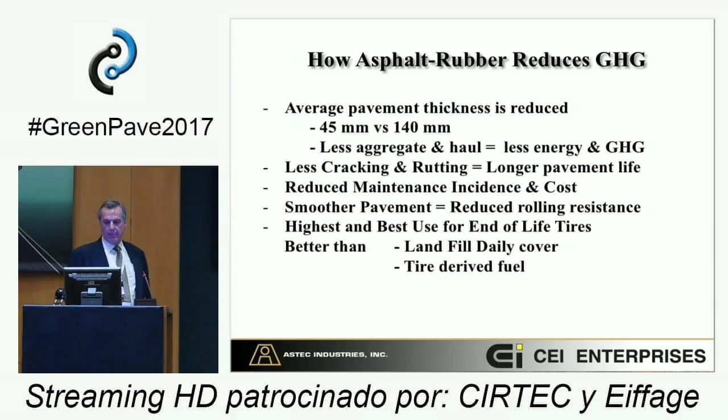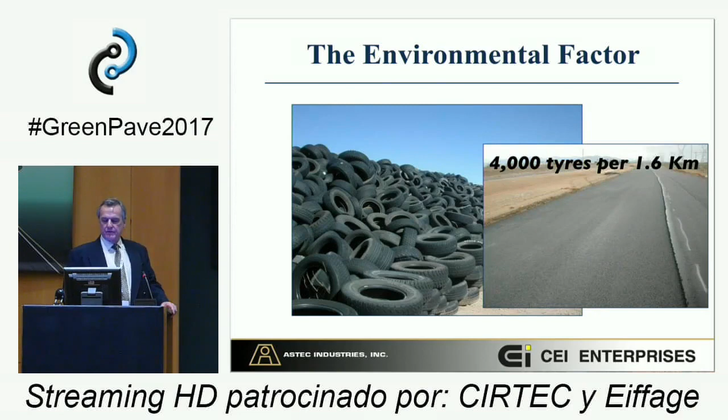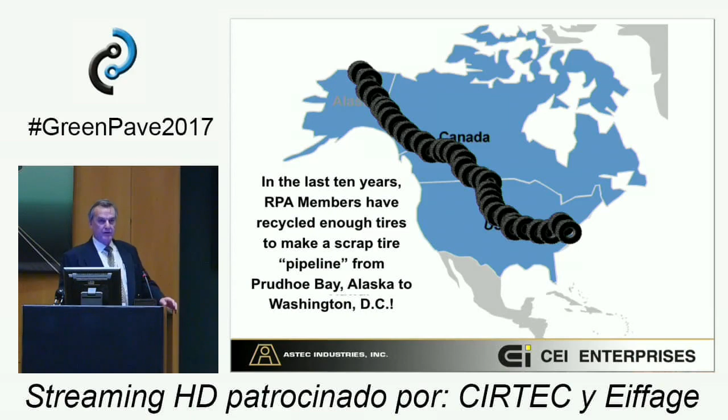We've talked quite a bit in the last day and a half about the environmental factors, but the utilization of tires into the roadways presents a significant outlet for these end-of-life tires. To put this in perspective, the Rubber Pavements Association figured a few years ago that over the life of that organization, its members had utilized enough tires and rubber to connect Prudhoe Bay, Alaska with Washington, D.C. That's a distance of 4,500 miles, or about 7,200 kilometers. To put that in European geography, that would basically be a tire road from Lisbon to St. Petersburg and back. So clearly there's a lot of opportunity to utilize tires in a very useful fashion.

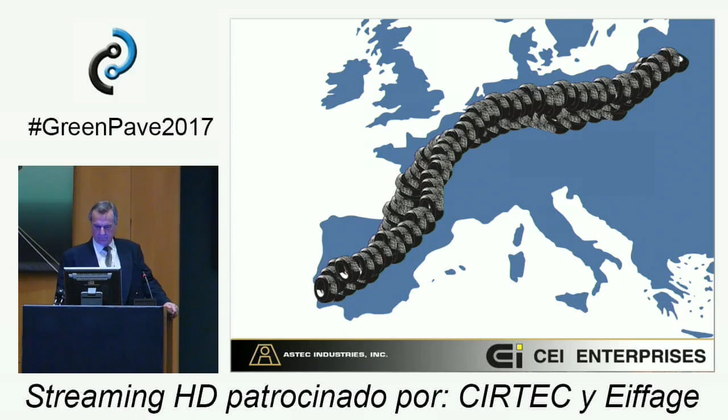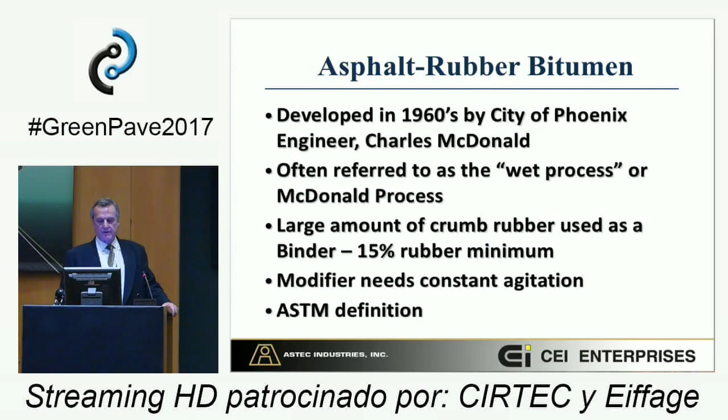So the history of asphalt rubber has been covered in some detail. The introduction of the technology by Charles McDonald is well documented. As far as the field blend wet process, there is an ASTM definition, and it basically says that you're using 15% or more of crumb rubber by weight. Most U.S. agencies - specifically California and Arizona - have a target of 19 to 21% crumb rubber. That's a typical utilization range. The specifications call for 18 to 22%. And the minimum target viscosity they're trying to achieve is 1,500 centipoise.

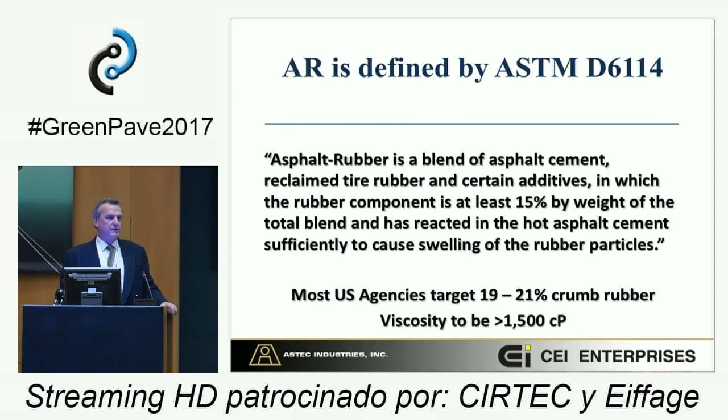So successful production of asphalt rubber is clearly a matter of proper heat management, and that's been touched on in the past here. The virgin asphalt temperature needs to be at least 190 degrees Celsius, which is 375 degrees Fahrenheit - that's the Caltrans minimum specification. Most of the blenders in the field like to have the virgin asphalt even hotter than that, as much as 220 degrees Celsius, simply because of the cooling effect that occurs when the rubber is introduced into the asphalt.

Aggregate temperatures are typically less than 163 degrees C, and at the breakdown roller, about 143 degrees. There are specifications in California that require ambient temperatures be greater than 13 degrees C in order to properly pave with rubber-modified asphalt.

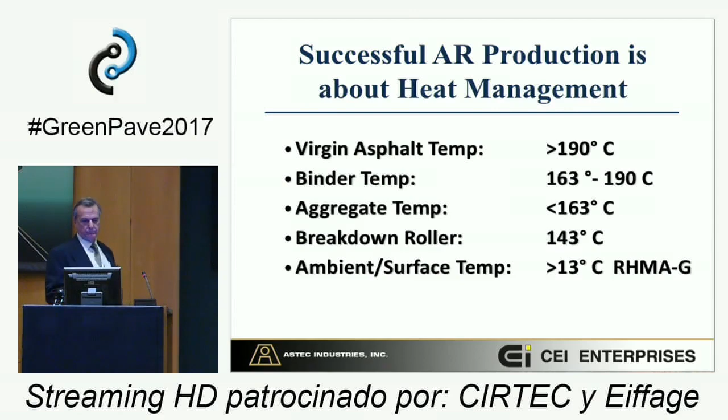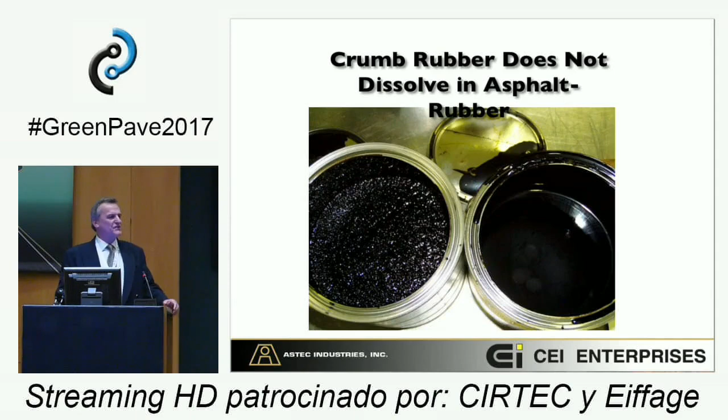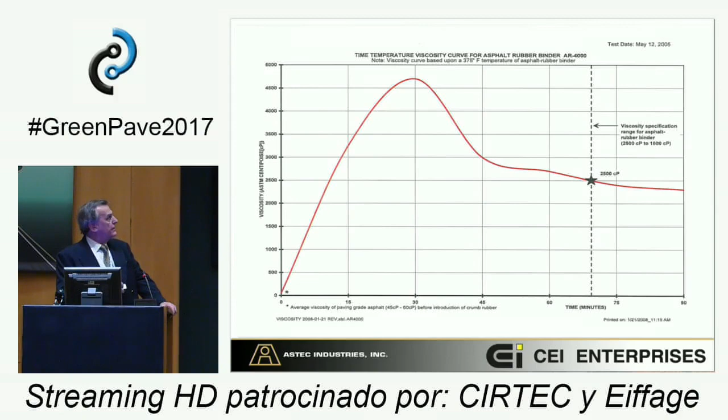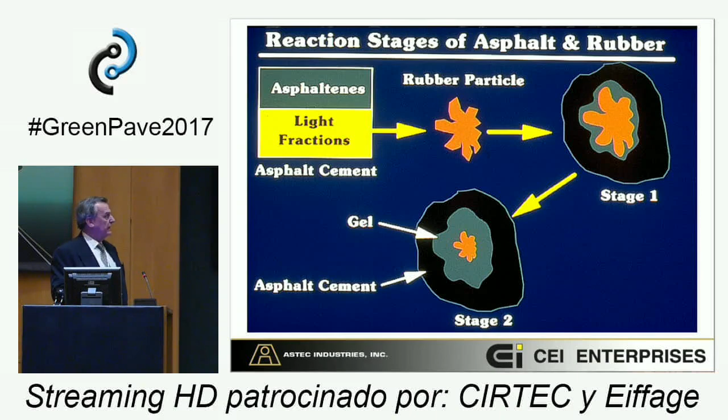The phenomenon occurs because of the temperature of the material, the reaction time, and other qualities, whether you're using a cryogenically produced crumb rubber or ambient grind. It all has to do with the surface area characteristics of the rubber particle and how rapidly and effectively it absorbs the asphaltenes. And of course, the nature of the asphalt is a key characteristic also.

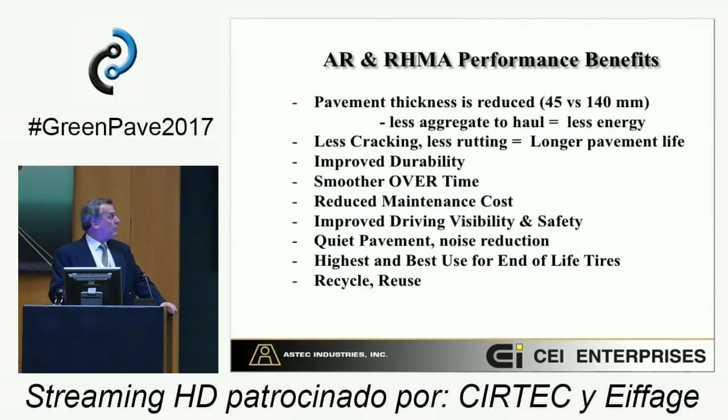I think George Way covered the performance benefits of the material quite well yesterday. But I did want to show these slides.

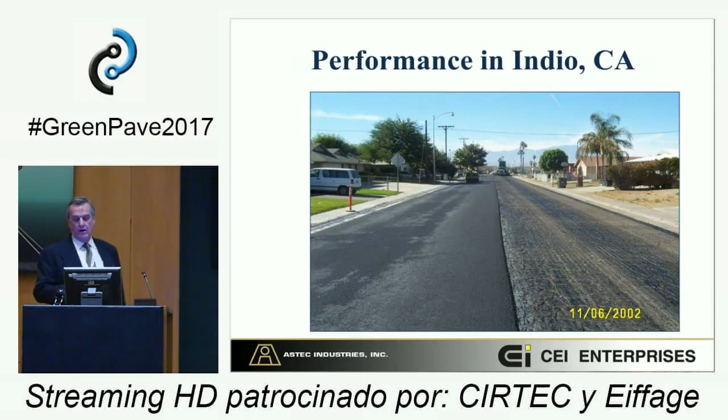These are some field slides. This was a residential street in Indio, California, near Palm Springs - a hot desert climate. Ambient temperatures in the summer are 40 to 45 degrees Celsius, or upwards of 110 to 120 degrees Fahrenheit. And you can see the old pavement is very cracked.

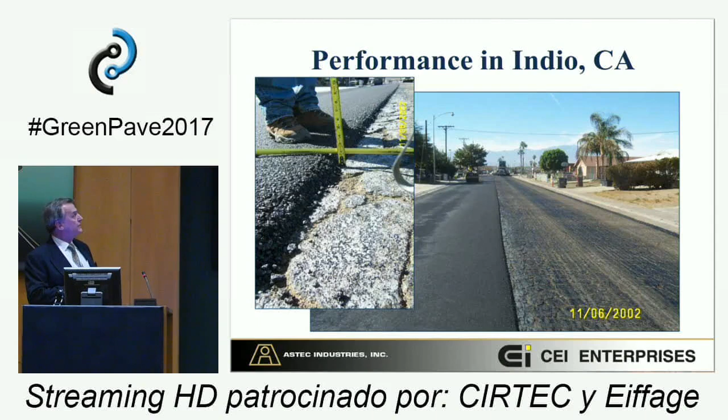There was a slightly less than 2-inch overlay of rubber modified asphalt installed, about 45 millimeters, with the result that years later, when this picture was taken, you had a very satisfactorily performing surface.

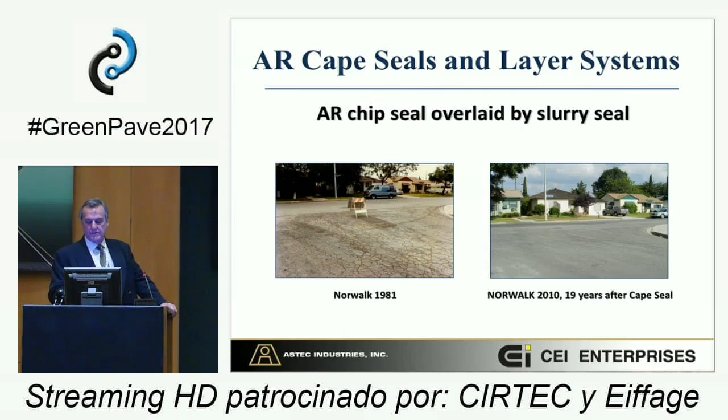Here's another application of asphalt rubber. This is a chip seal, which is just a spray applied surface treatment, done again on a residential street. You can see it was the street just before the application in 1981; 19 years later in 2010, the project was performing quite well. So a 19-year life with this material is an excellent cost reduction maintenance treatment for this municipality.

So now I want to turn to a more detailed look at the process, and augment some of the points that Louis touched on earlier.

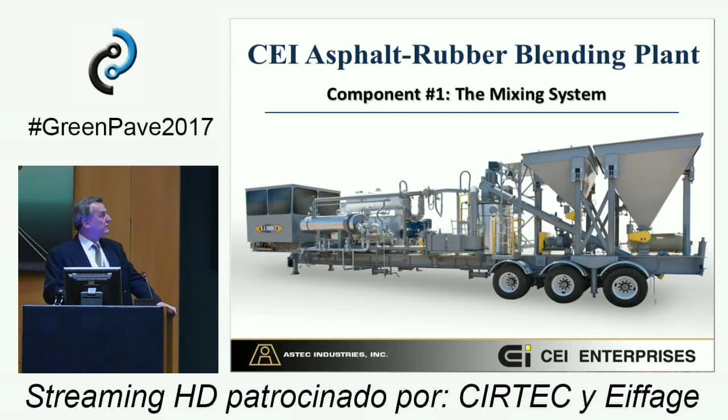CEI built their first rubber plant in 1992. Since that time, we've constructed approximately 60 of these plants. Over the years, the design, characteristics, production capabilities, and some environmental aspects have changed. But the system is basically comprised of 2 units. The units I'll show here initially are mobile units meant to be moved from job to job. The first trailer is the mixing blending unit, and the second is the reaction tank.

At this point, we're going to look at the process flow, and my associate, Stuart Baker, is going to pass out some samples of rubber used in this process, just so you see visually the type of material being used.

Stuart accompanied me on the trip today. He's our post-production manager. I can tell you how these plants are supposed to work. Stuart can tell you how they actually work. Stuart gets to go out in the field and make them work.

So we're dealing with, in the case of these California plants, 2 dry materials and 2 wet materials. We have 2 rubber feed hoppers mounted on load cells, so we get a loss-in-weight indication during the production process to measure the flow of the crumb rubber.

The larger hopper, in California, 75% of the rubber used is crumb rubber, the coarser sample you see there. The mesh size is 100% passing 10 mesh, which is 2,000 microns. 16% passes 30 mesh, which is 600 microns. That gives you some idea of the coarseness.

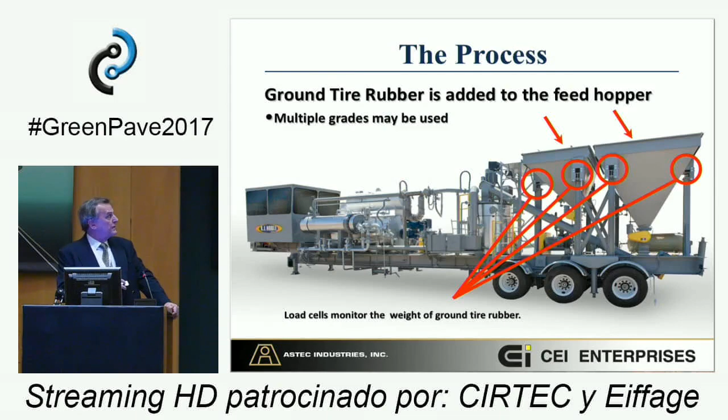So 75% of the rubber is this crumb rubber, and 25%, the balance, is what we call high natural, or truck tire rubber, which has a higher natural rubber content. That material is 100% passing a 1,200 micron screen size, 78% passing minus 30 mesh, or 600 microns. So it's a finer material.

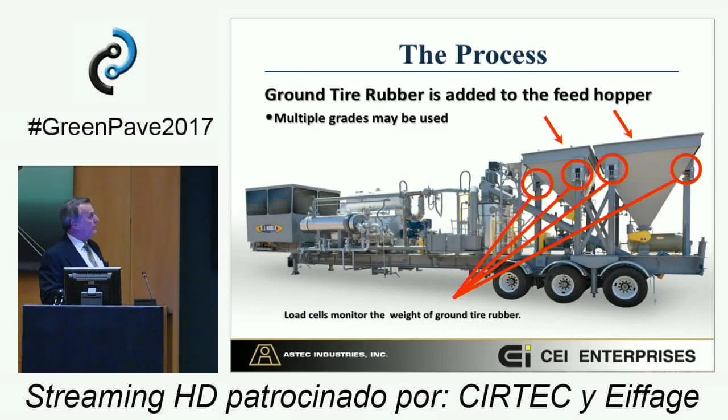So we add the rubber into these hoppers, and the process weighs that material as the rubber is conveyed from the hopper into this incline auger, up into the initial mixing vessel.

Now, some of our clients, particularly surface treatment people, are not putting high natural into this hopper. They're putting in a polymer, a proprietary blend they've developed. They don't like to talk about what kind of polymer, but they've indicated they're using sometimes 1.5% to 2%. It is possible to use a different material in that second hopper.

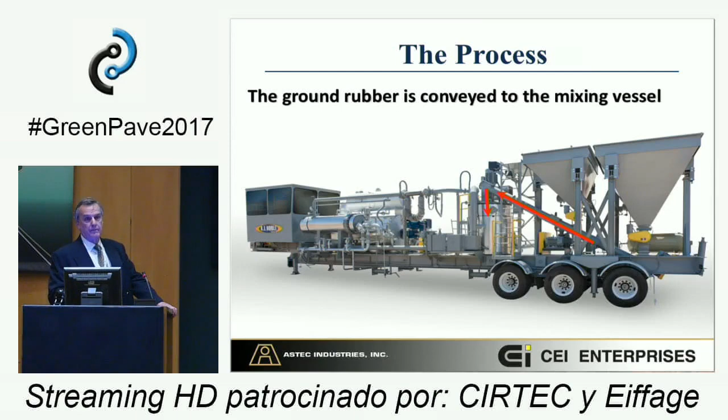Having gotten the rubber into the mixing can, we turn to the liquid asphalt introduction to the system. We put a heat exchanger on the plant, designed to give the user a 100-degree F delta T on his incoming asphalt.

Asphalt typically can be delivered at about 325 degrees, which is 163 degrees C. Caltrans has a requirement, as I mentioned earlier, of 375 degrees, or 190 degrees C. Most producers will heat the asphalt up to somewhere over 400 degrees, maybe even as high as 425, simply because there can be as much as a 50-degree drop in asphalt temperature when the rubber is introduced. The rubber is at ambient temperature, so that has a temperature reduction effect on the liquid asphalt.

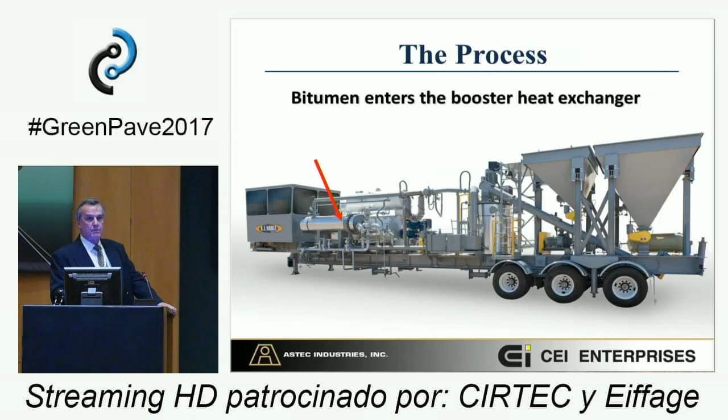So the heat exchanger is here. We use a large heater for supplying the thermal fluid, and the thermal fluid from the system goes first to the heat exchanger, then throughout the rest of the process to heat the lines and pumps, and to keep the reactive material in the reaction tank hot and at the proper temperature.

Just a comment on the production rate of this plant. We work with some very large, high production producers in California, particularly Southern California, where it's essentially a 12-month paving season, depending on wet weather in January and February. We have some producers there who will make upwards of a million tons of hot mix a year out of a single facility, so they're very much production oriented.

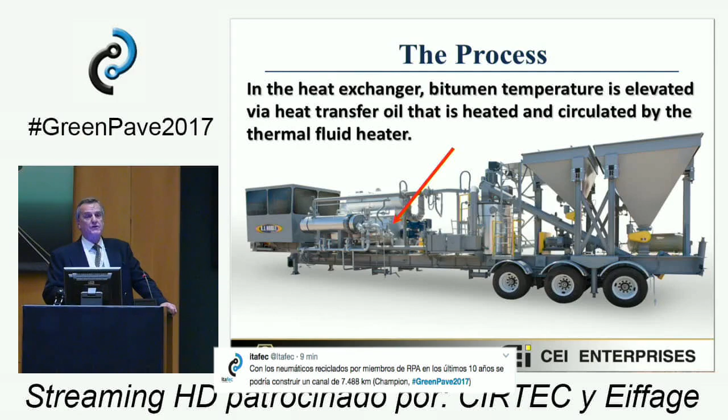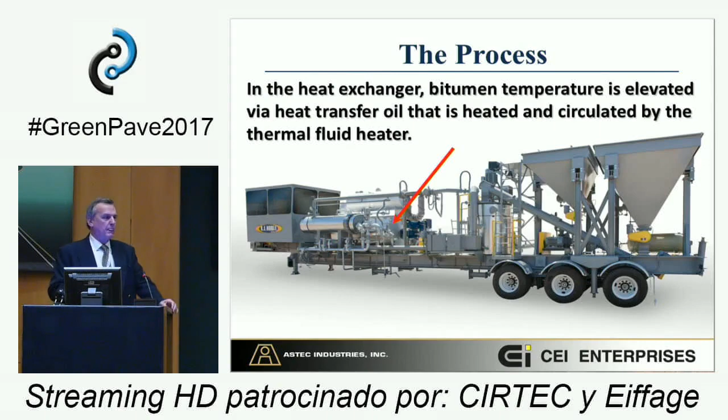So the production capacity of this plant is designed to supply 35 tons an hour of reacted bitumen to the hot mix plant. Oh, okay, well, I didn't complete the cycle.

The asphalt, after it comes out of the heat exchanger, goes through a Coriolis meter, a Micro Motion meter. This gives us flow indication to match, so we keep the crumb rubber percentages and the asphalt in compliance. It's a recipe-driven formula.

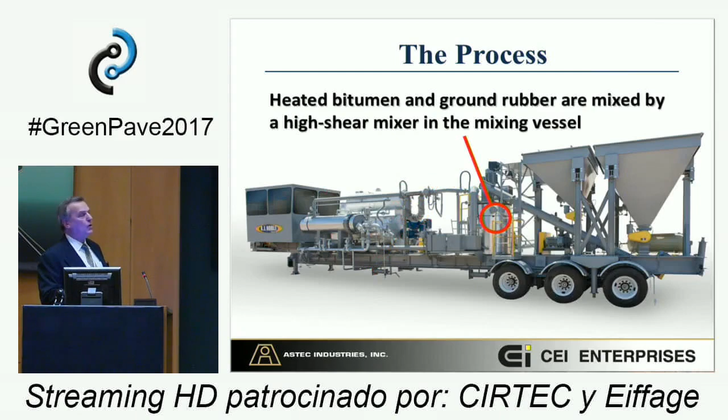In this mixing can, we have a Coriolis meter and a Cowles mixer. It's powered by a 30 horsepower motor and rotates up to 3,600 RPM. It's really like a milkshake mixer, creating a vortex of material. Its sole purpose is to combine the crumb rubber with the asphalt so that mixture can then be pumped over into the reaction tank.

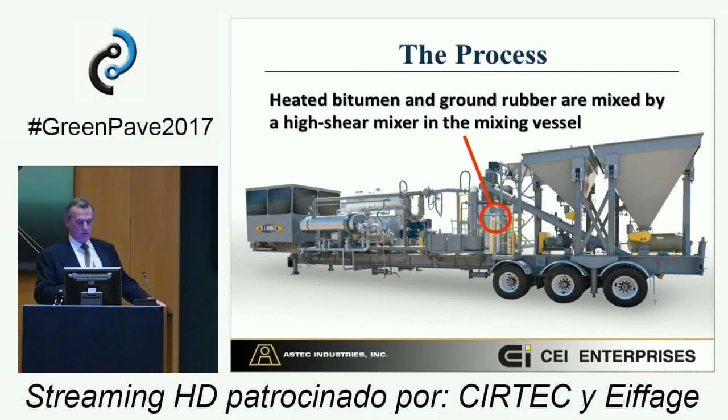In the reaction tank, this is where we're doing the digestion of the material. California requires a 45-minute reaction time. Arizona requires a 60-minute reaction time, just a different specification.

This tank is 24,000 gallons, roughly 80,000 liters. To address the whole production issue, if this was a single compartment tank, we'd have to do three things in that tank before the material could go to the hot mix plant. The first thing is we would have to fill the tank up to a desired level and then start the reaction process.

Caltrans requires that you don't get credit for the first amount of material going into the tank. You only get credit towards the reaction time when you put in the desired amount of material. In this case, 24,000 gallons would take about an hour and a half to fill up. So you'd be an hour and a half to fill it, then react it for 45 minutes, and then you could start delivering material to the hot mix plant.

Working with high production producers in Southern California, for years we were supplying a 2-compartment tank. At some point, with a producer trying to achieve a production rate on the order of 450 to 460 tons an hour, we devised a 3-compartment tank.

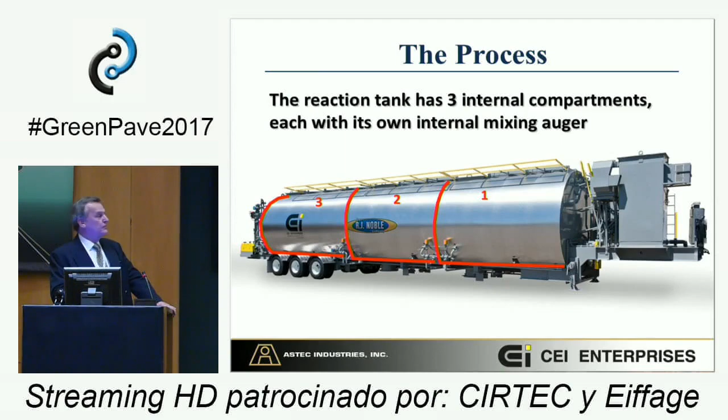So what you have is an equilibrium situation where you fill a compartment in 45 minutes, you react a compartment in 45 minutes, and you're draining a compartment in 45 minutes. That's three steps occurring in each compartment sequentially. This was our solution to meeting production requirements for high volume producers.

The same principle applies to smaller plants. If you only needed to make, say, 10 tons an hour for a 100-ton-per-hour producer, this same concept would apply, as opposed to having one or two tanks to try and balance out your whole production situation.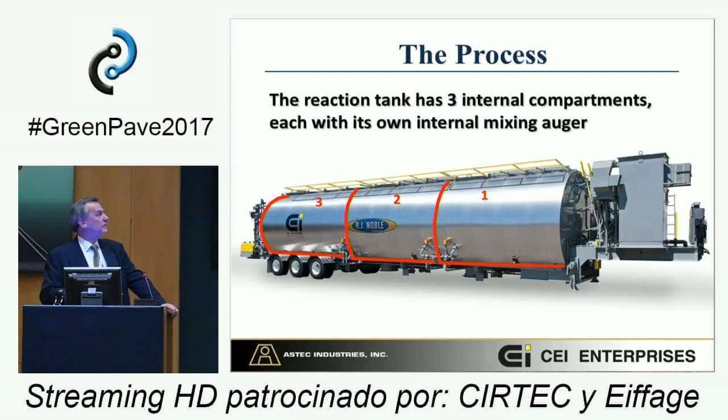Some other things we have to do in these plants, since Southern California is a very environmentally conscious area, is use vent condensers that are air conditioned and even have a second phase of collection with an electrostatic precipitator. This pulls the blue smoke fumes off the emission points on the tank, and also vents the inside of the tank to capture these fumes, reducing not only visible emissions but also the odor from those blue smoke fumes.

This is a look inside the tank. There have been some questions raised today about mixing in horizontal tanks versus vertical tanks. In these horizontal tanks, we're using a 24-inch auger. It's a closed blade, so we're pushing the material into the middle and forcing it through the heating coils, which facilitates heat transfer to the material and keeps the coils clean over time. It's a very effective mixing technique.

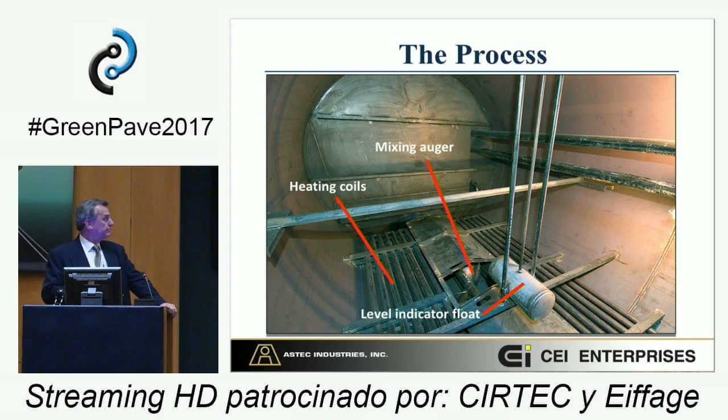After the material is reacted, it's pumped off to the asphalt plant and utilized.

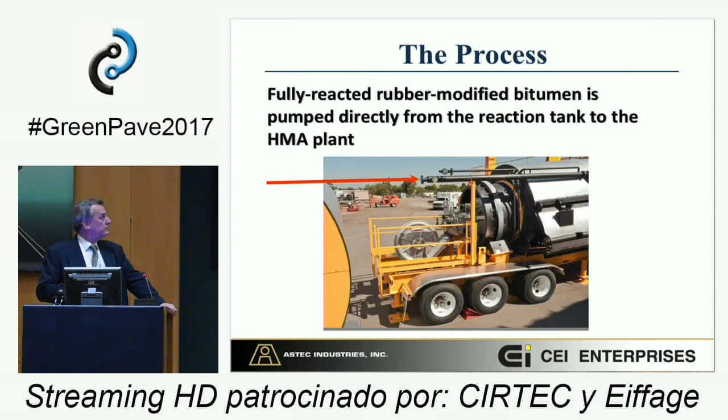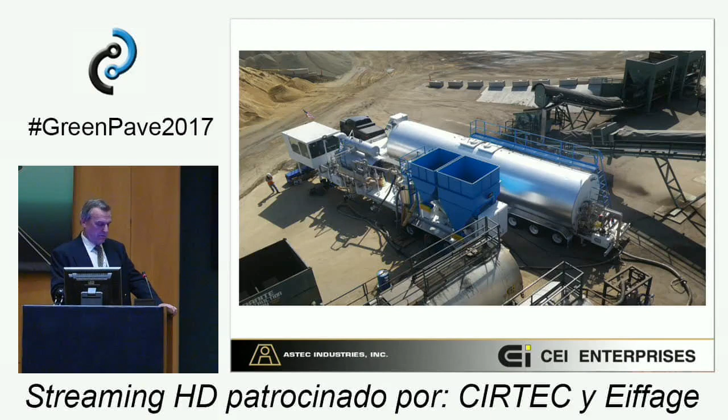These are some pictures of actual plants. This is a plant operated by a company that has 6 rubber plants. They are a subcontractor who move from project to project to blend material for customers they've bid projects to. And that's a picture of a super sack. The material is always supplied in 2,000-pound, 1-ton sacks.

This material is supplied by a company called CRM, Crumb Rubber Manufacturers. Some of you may know Dr. Barry Takallou, who is the owner and founder of CRM. Not only is he the largest ground tire rubber producer in North America, he's also a world-recognized authority on the tire recycling business and utilization of rubber in asphalt.

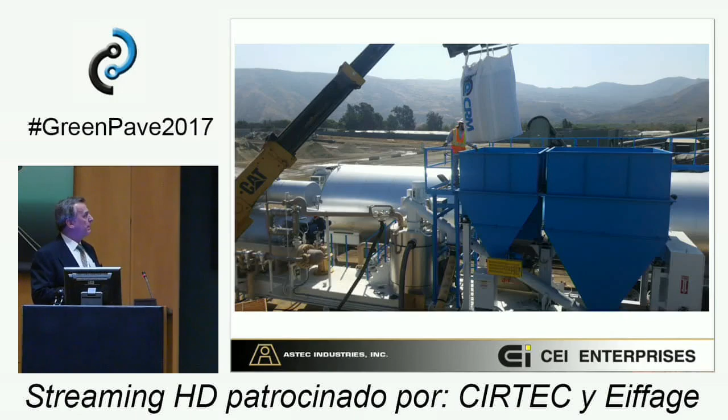Here's another plant, owned by a single asphalt plant operator. Business in California has been so good the last few years that the contract blenders can't get around to all the projects. Consequently, we're seeing more people who, while not necessarily having a large production requirement for rubber in any given year, need their own production capacity to keep control of their jobs.

People frequently ask me how many tons you have to produce in a given year to make the investment in a rubber plant practical. There are several ways to look at that, and there have been interesting stories recently. I can think of one company in the Bay Area that was ready to start a 200,000 ton freeway overlay job, and they couldn't get any of the people that had bid them to blend rubber to come in on the job, so they ended up having to go with a very expensive alternative to satisfy their requirements.

So we see in California, it's my vision that as years go on, more and more plants, possibly even all plants, will have a rubber blending facility located permanently at their plant.

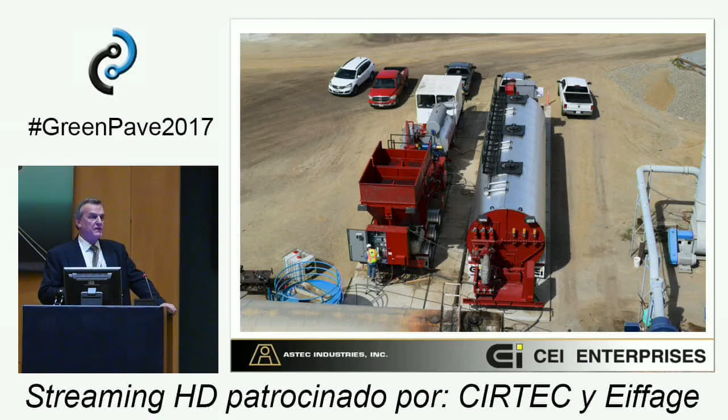This is a plant we supplied for Boral Resources in Australia. It's a little different design - they utilized this plant for chip seal applications, so they needed something more transportable, and didn't need a very high production rate. This is sized for 15 metric tons an hour.

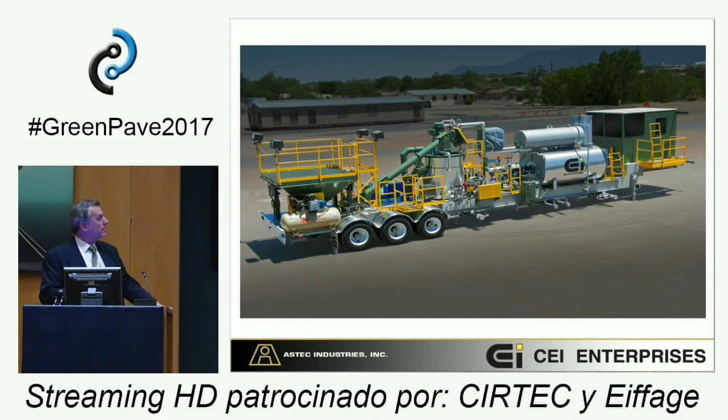Now, here's a plant we just recently supplied for Constructora El Condor, headquartered in Medellin, Colombia. This plant is set up in the eastern side of Colombia near the Venezuelan border. It's a 15 ton per hour plant, built on a flat rack platform, so it's easily transportable.

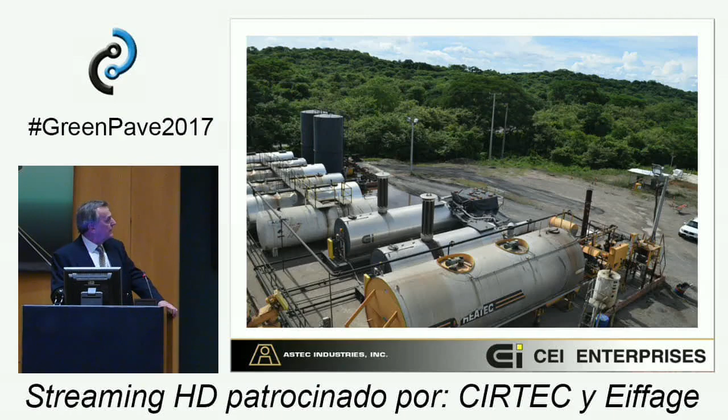There are no wheels underneath it, but it's easy to pick it up, put it on a truck, and move it. In this particular plant, you can see a little better, we have two 6,000 gallon reaction tanks, the heater and heat exchanger on this load, and a single rubber hopper with the attendant pumps, meters, and so on in the control panel.

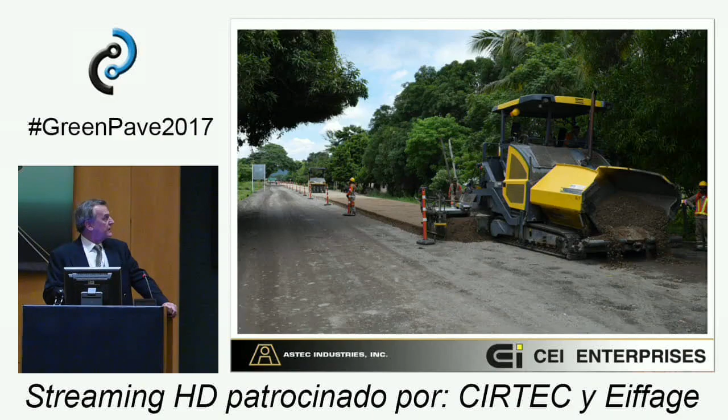El Condor has a 100 kilometer concession job, and they're rehabilitating the roadway. There you see they're putting down a new aggregate base. They're paving, and then they're going to cap this off with a 2-inch rubber hot mix top coat. They're using the material specifically because they know it will last longer than conventional materials, and since they have a 30-year concession to maintain this road, they're doing everything they can to eliminate future maintenance.

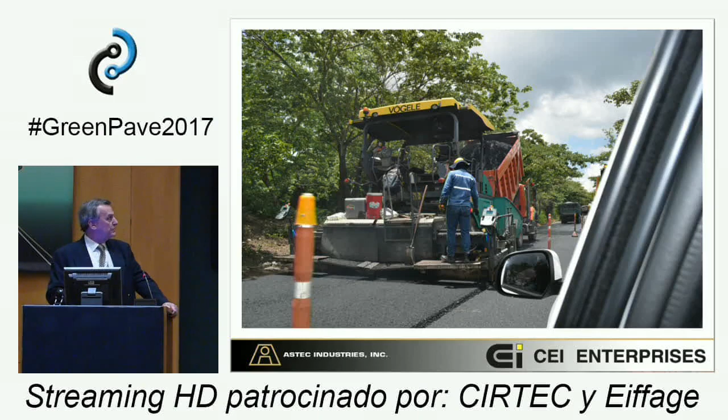So to bring this back around, as far as greenhouse gas reduction with asphalt rubber, I touched on some of the broad brush aspects of it. In doing a literature search in preparation for this talk, I found that George Sousa and George Way, along with Doug Carlson with the RPA, published a paper in 2009 that documented CO2 was reduced 234 tons per lane mile over conventional materials. That study was published in their 2009 symposium proceedings.

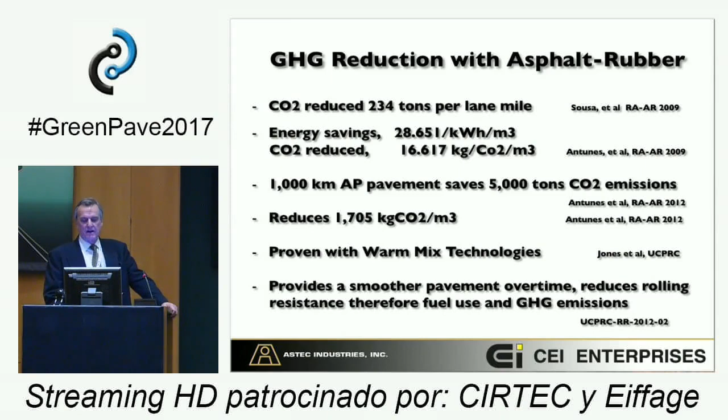But you see other authors, increasingly in recent years, documenting various CO2 reductions based on various parameters. In addition, an interesting paper published in 2012 by the University of California, Davis Pavement Research Center documented the improvement in rolling resistance of vehicles on pavements that were smoother. So again, smoother pavement, less rolling resistance, less fuel consumption, therefore less greenhouse gas emissions.

So we say, this is important because, or as I say in my Spanglish, porque why? We have our future generation - these are our grandkids, actually got some more on the way. Aiden, Christopher, and baby James are looking forward to a long life on a green planet.